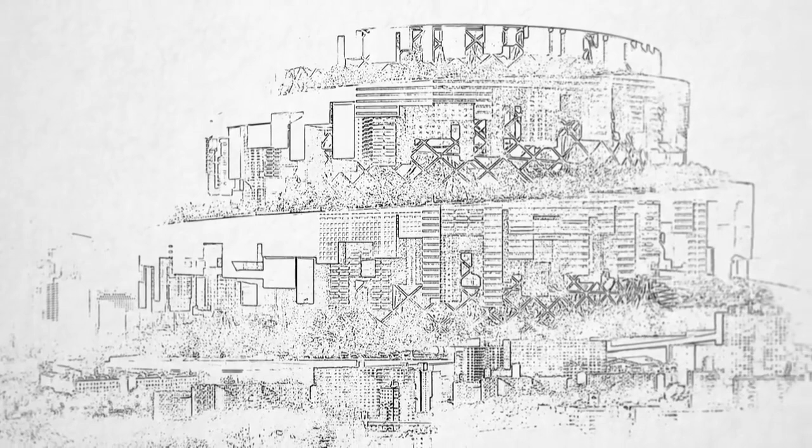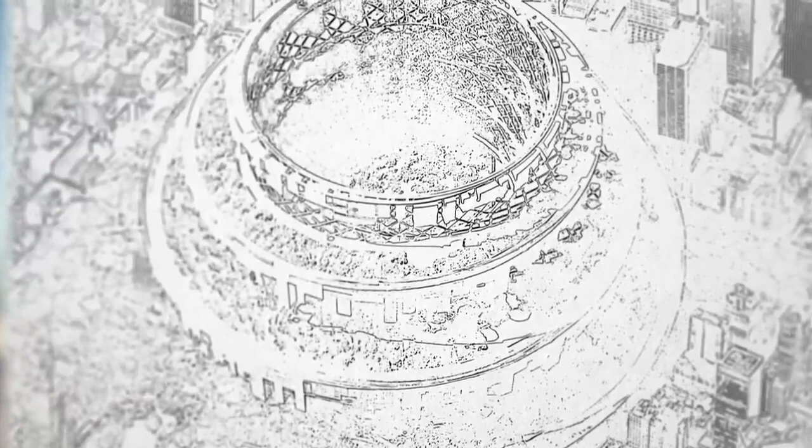Max Schwitthaler, an architect from Berlin, has numerous visions of what the city of the future could look like. His designs have names like Babeltown. Instead of showing individual buildings, they show entire neighborhoods, parts of a city, that appear lifted straight from the set of a science fiction movie.

That's how futuristic his designs seem to be. They ask what the city of the future might look like if we dispensed of conventional forms of mobility, like the car and the traditional elevator.

Some of these are provocative images that may look utopian at first glance, but there's nothing utopian about them. Babeltown was simply the idea of how the linear movement of a tram or a train could be turned into a spiral. The same goes for the village.

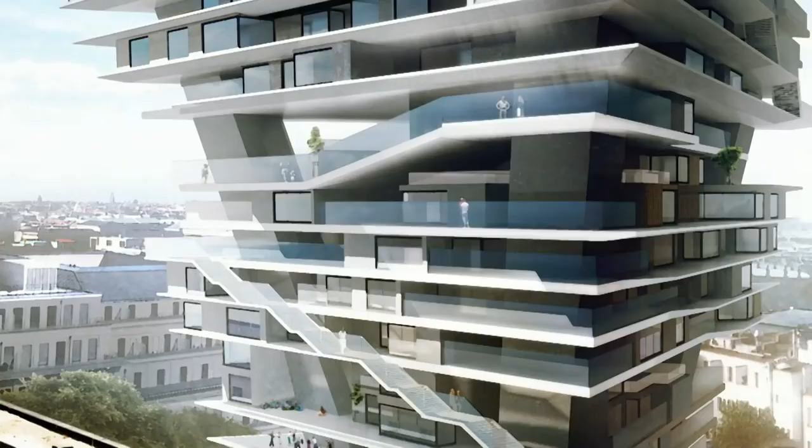The idea was to see what happens when we have a diagonal elevator, a zigzag movement. We wanted to show how the movement through the space is always the inspiration for the space itself. Just as it is flat in a car city and vertical in an elevator city. That's exactly the same, only other mobility technologies serve as the input and inspiration for the design.

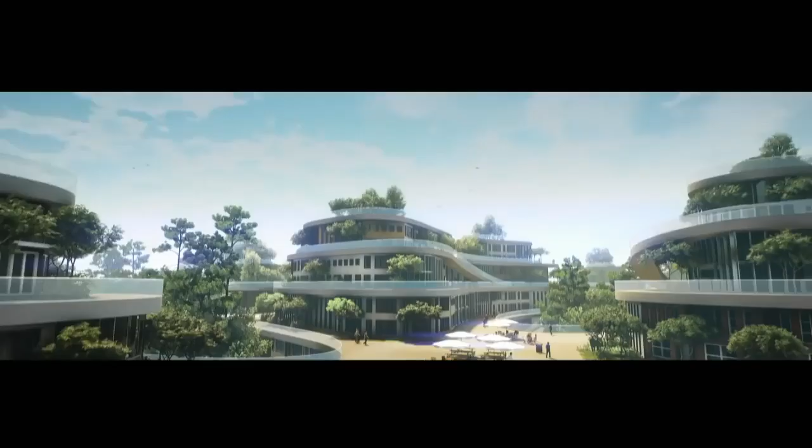Schwitthaler's current concept was also based on this principle. He calls it the urban shelf. A neighborhood complex in which there are no cars taking up valuable space, but where people move from place to place with the help of so-called micro-mobility solutions, which are extremely flexible.

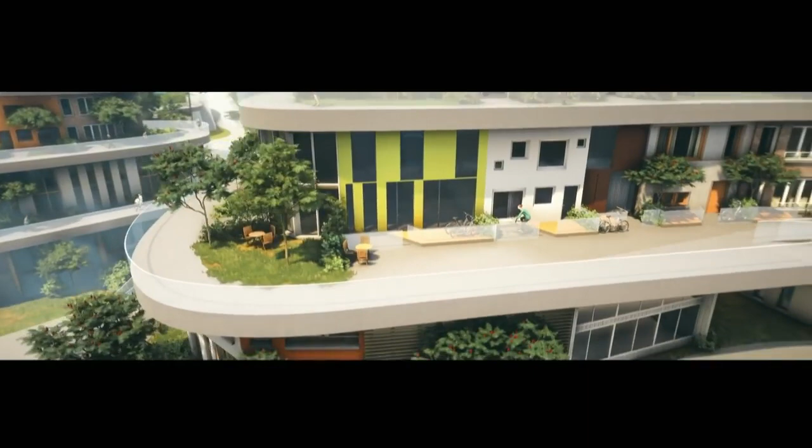Instead of thinking in terms of finished architecture, we're focusing on the infrastructure that makes living together in a neighborhood possible in the first place. This starts with the basic structure and includes the floor, the ceiling, and the load-bearing structures, and the necessary infrastructure for water and electricity.

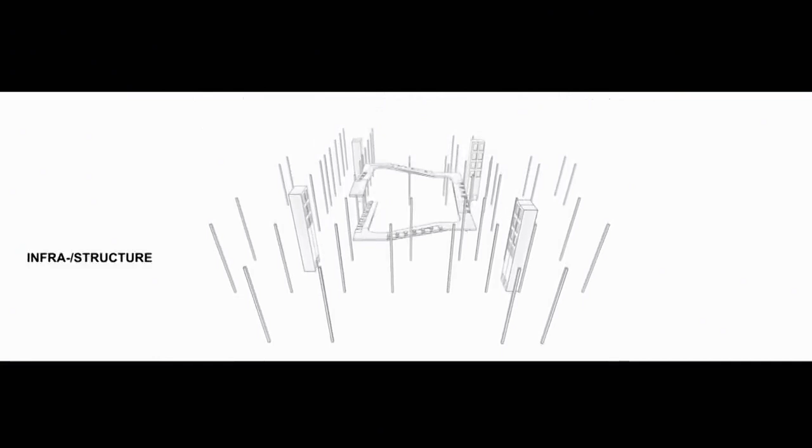Everything is built like a giant shelving system. Floors are stacked one on top of the other, with the shelves filled in between them. There are no individual buildings, but rather a single superordinate structure.

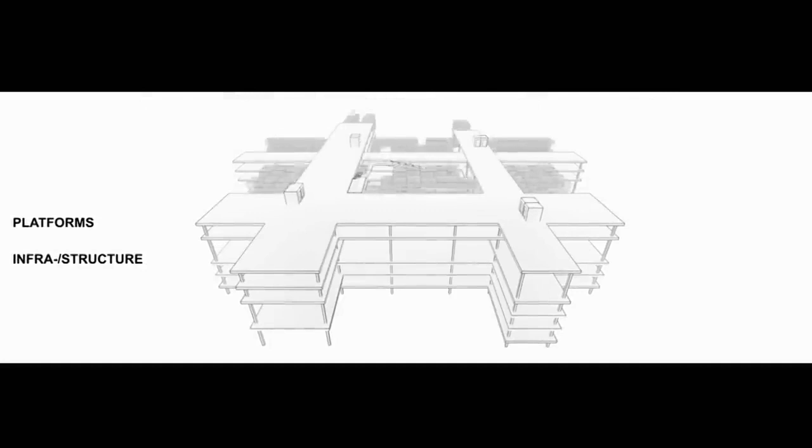The idea is that these shelves will be connected with ramps for e-bikes, which can then easily ride up the hill, providing access to pergolas and public spaces that are found on the different stacked layers. And in between, there is room for living and working.

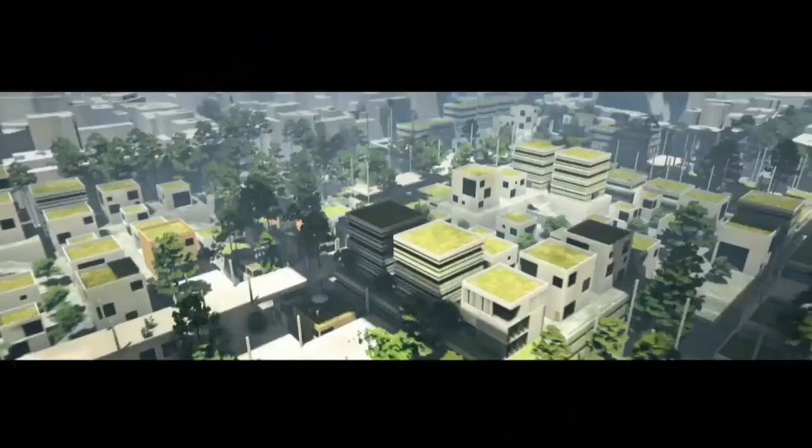That's the basic idea. It can be a very flexible way of building. It's not cast in concrete, so it can change over time. Material, function, size. What happens between the shelves is completely flexible. Only the basic structure is built to last forever.

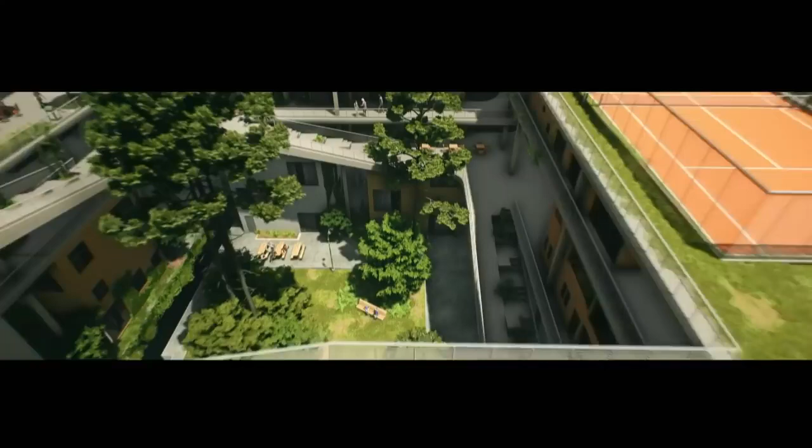There are no high-rise residential towers here or multi-lane highways. As glib as it may sound, Schwitalla has created his design with people in mind.

The urban shelf seeks to provide solutions to the densely populated city of the future, but aims to do so on a human scale. It creates meeting places that we otherwise lack in cities today, not just on one level, but on different levels. People can actually meet and interact on several different levels. And that, we believe, is how we can and must ensure the social sustainability of a city of the future, through social exchange. We go to the city to meet and interact with others.

Tempelhofer Feld in Berlin, formerly home to one of the city's airports. It is the largest open space in the German capital. This morning, Max Schwitalla has converted this space into an experimental laboratory. It is the first step in turning his design into reality.

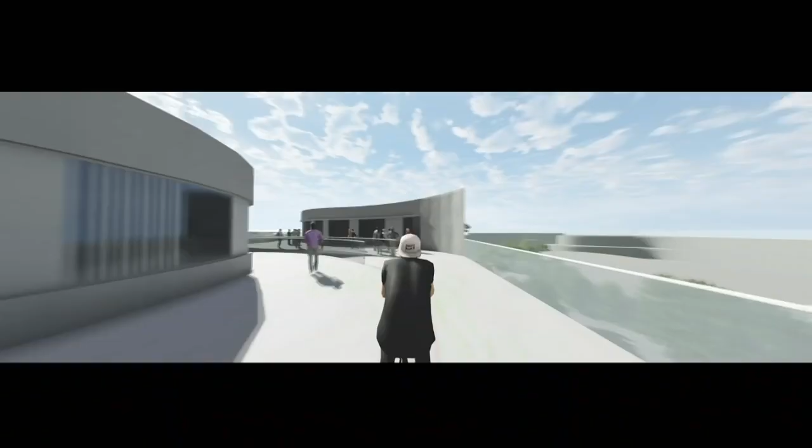Via an app, a virtual map is created that makes the urban shelf a livable experience. All that's required is enough space and the right vehicle. Max's colleagues provide support during his test drive.

Here you can see the path that you can follow. You can also see some neighborhoods or buildings that you can't drive through. But the key thing is the path, which is shown here in blue. If we now project the virtual designs from the computer onto the surface, then we can literally experience them for ourselves by cycling through these neighborhoods and getting a sense of what it feels like.

Then we can see if the curves are a bit too tight, or if it's a bit too long and straight and therefore a bit boring. That way we can adjust and change the designs again after experiencing it out here in 3 dimensions.

Every day, Schwitalla sees how the need for alternative forms of urban mobility is becoming increasingly urgent. Parts of the heavily congested Leipziger Straße in Berlin have recently seen a speed limit imposed due to rising levels of air pollution.

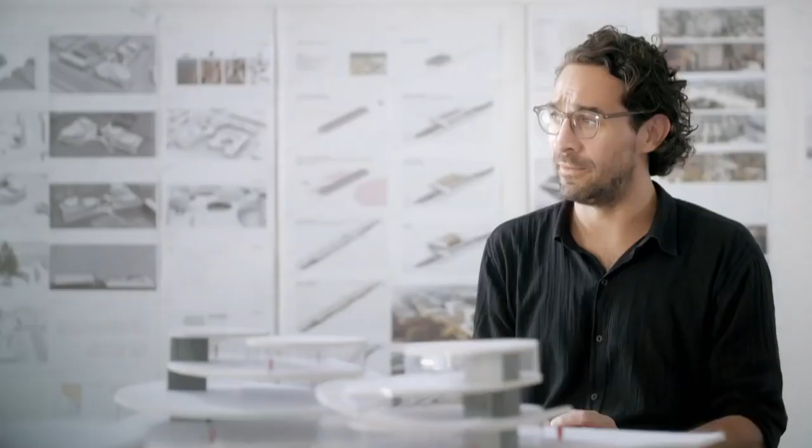Of course, we don't have the same traffic problems that we see in Mexico City or in India or in other developing regions and the megacities they have there. But even here you notice the fine dust pollution. So we have to ask ourselves, how can we get the cars out of the city? How can cities continue to grow? We also need more affordable living space. There's enough for us to focus on here in Europe.

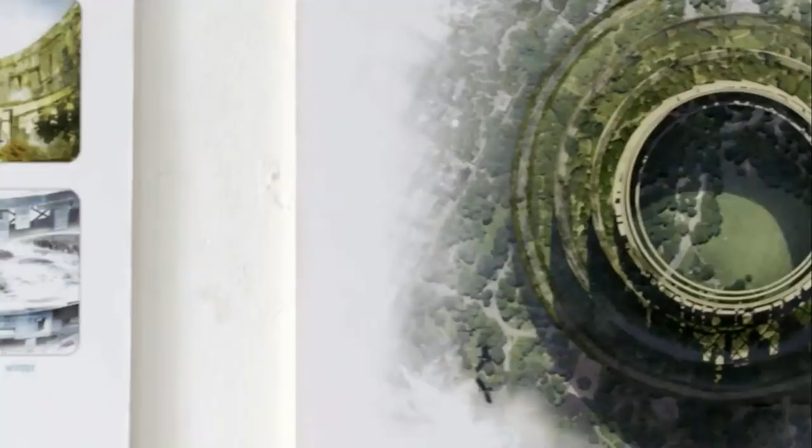Schwitalla's architecture studio often works together with companies from the mobility sector itself. These include car manufacturers and elevator builders, such as Audi and Schindler. The industry has long recognized that it can only remain sustainable by providing new solutions.

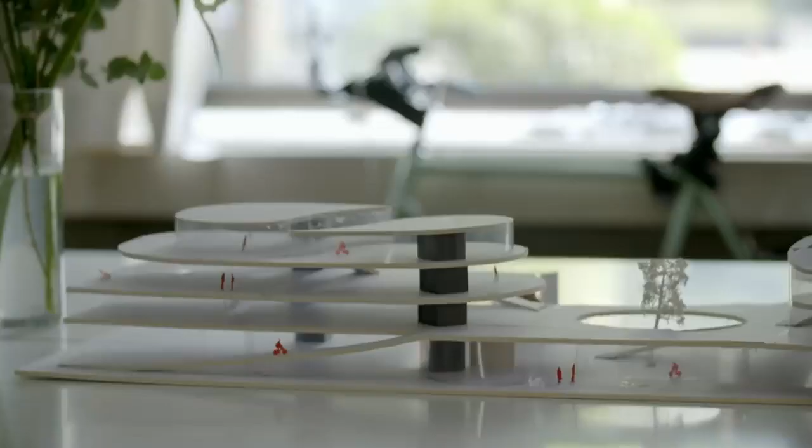For Schwitalla and his colleagues, the future of our cities depends on our willingness to rethink established structures. The urban shelf frees itself from the idea of architecture as a design spectacle and instead offers a system-based solution, one that is individually adaptable to any location, to any social structure.

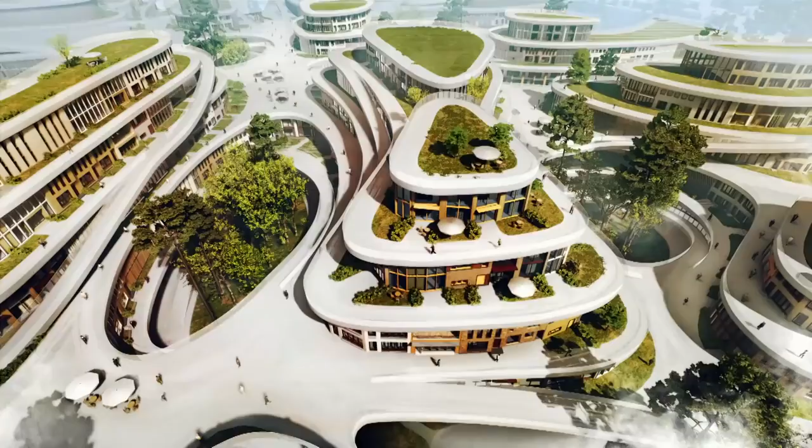The shelf contains space both for luxury apartments and affordable homes.

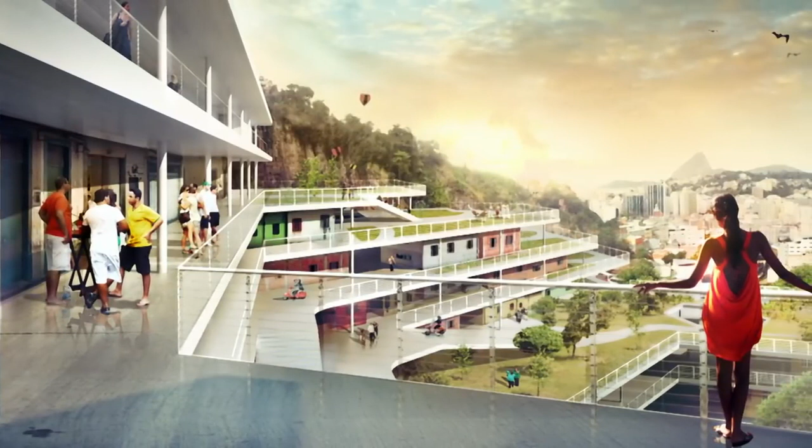We studied the idea together with students in Brazil and found that it would make sense to have the basic structure financed with public money to build the essential infrastructure, and then have the people living there build the living spaces within it, their neighborhood, with their own hands.

A bit like they do in the favelas already, but within the structure of the urban shelf. That's also what we were aiming for, a certain versatility and visual diversity in the appearance of these living spaces.

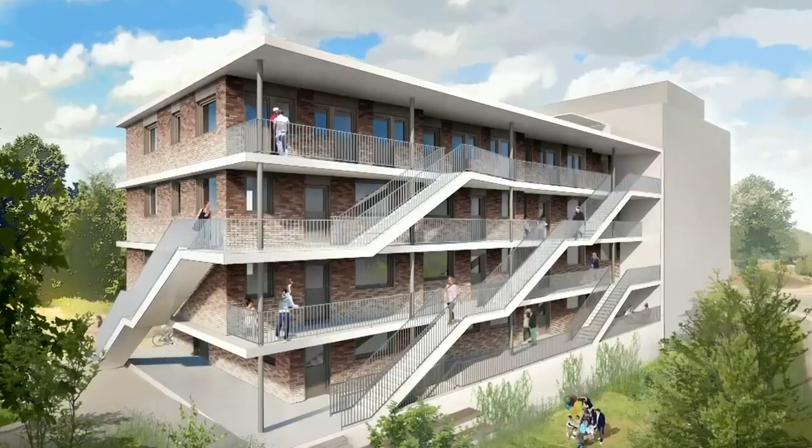In Tübingen, in southern Germany, this dream may soon become a reality. The first urban shelf has just been created here. While not yet a fully fledged urban neighborhood offering micro-mobility transportation options, it will nonetheless provide space for people to meet and socialize. Students and refugees are intended to live here.

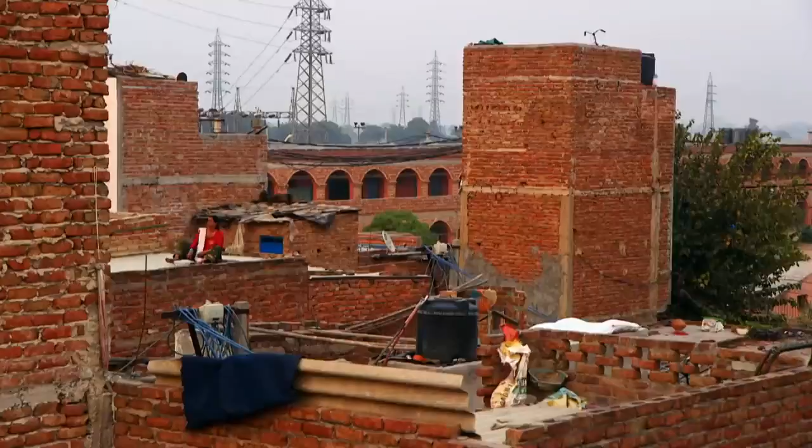How cities grapple with this is going to be a challenge, because cities are about people living together and working cooperatively. And if you can't live together in a city, you can't have a city. The system breaks down.

You don't have to travel to the developing world to see what this looks like. This problem has long been part of Western societies as well. A stone's throw away from Harvard University is the Massachusetts Institute of Technology, known as MIT. More than 11,000 people study at this elite university, but they can't live here. While there are plenty of laboratories and offices available, there is nowhere for people to call home.

The decision about land use is captured by international companies or real estate developers that want to maximize their returns. So as a result, in this neighborhood, we have no grocery store, there's no pharmacy, there's no daycare center except for MIT people, there's no healthcare facility. You would have to walk a long, long way to be able to buy broccoli or a toothbrush. And very few people live here. What little housing is here is only for rich people. So at night it's completely dead here because it's not really a functioning community.

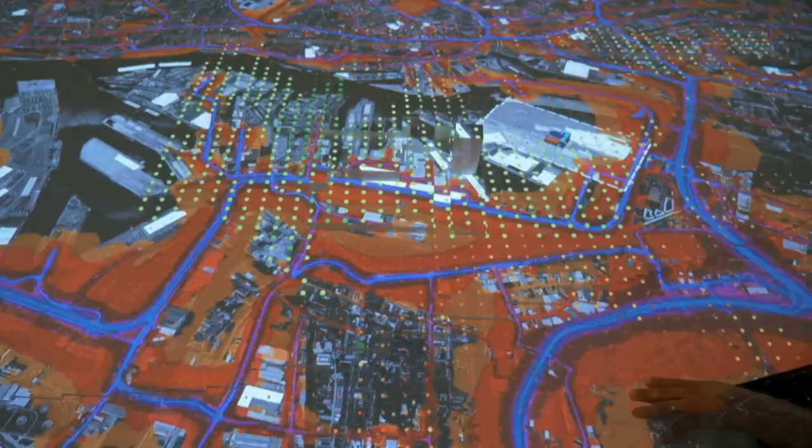It's not that urban planners don't care about these issues, but that they don't really have the tools to have an impact on them. Now, researchers at the MIT Media Lab are building these tools. The study group City Science is looking for ways to make towns and communities more livable for their inhabitants through the use of new technology.

The group is led by Kent Larson. Previously an architect, he is now focused entirely on research. One of the applications of technology that we are most excited about is to reinvent the process using technology and the decisions about land use.

Neighborhoods and entire cities can be simulated on one platform. What happens when new homes and offices are built? How does the flow of traffic change? How many inhabitants are too many? Which parts of the city are busy and at what times?

This is Kendall Square, where MIT is. It's a 1 square kilometer district. MIT now has control of 14 acres, this area right here, and they are going to be developing this in the future. It's the last opportunity to turn Kendall Square into a real functioning community.

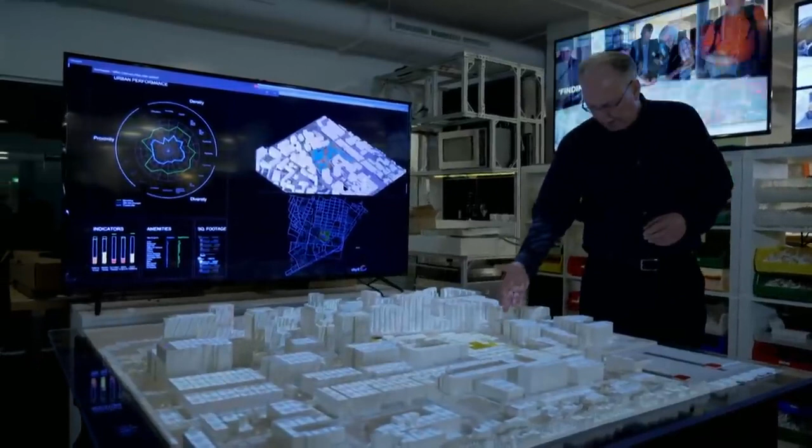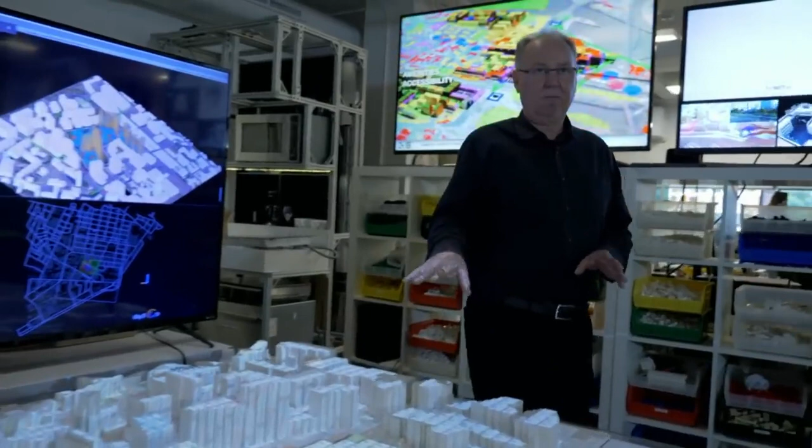So you can see most of the buildings here are represented by these codes. O is office and R is residential. So then when we run our simulations, we're taking into account the mix of people of different demographic profiles that might live or work in each of these locations, and we can change those on the fly.

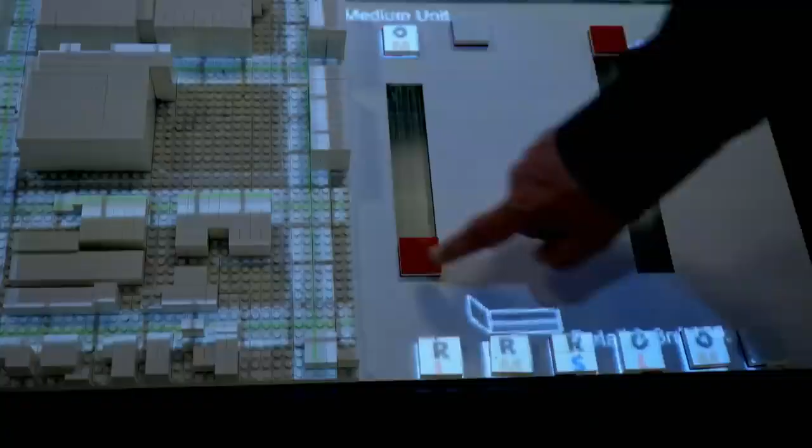The model has been fed with data sets that allow countless scenarios to be simulated and urban planning to be carried out in an interactive way. The idea is to be able to predict the consequences of planning decisions. The individual components of the model are like building blocks that can be exchanged, which has an effect on the entire neighborhood. Lego bricks are used to simulate the construction.

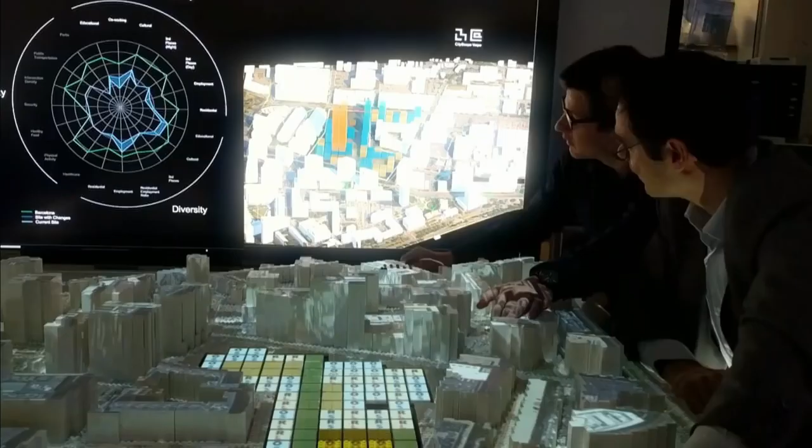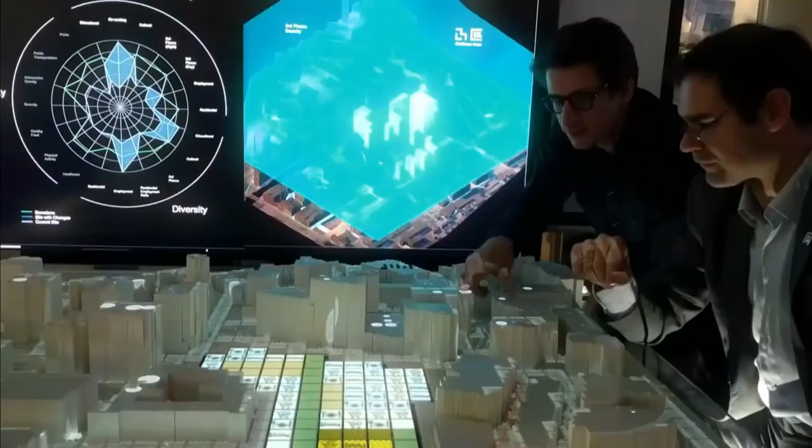With this kind of tool, you can have lay people who live and work in the community be involved in an interactive way in the process, and you can have the mayor, the staff, and the civic leaders be involved too. We think of it as a democratization of design, putting powerful tools that are currently only available to experts into the hands of non-experts to engage them in the process.

This dialogue between urban planners, investors, politicians, and citizens is an attempt to meet the needs of those who actually live in the city.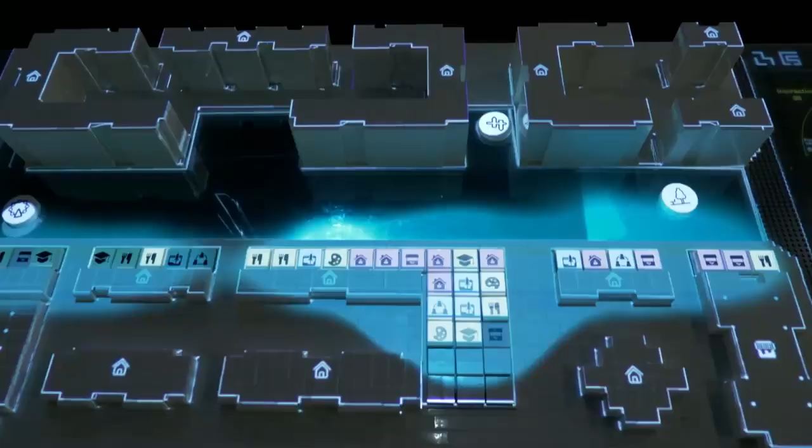The first projects are already underway. We're working in Hamburg, using a tool like this to help address housing for refugees. We're working in Helsinki to help redesign the campus at Aalto University. This model is a street in Shanghai near Tongji University. Eventually we'd like to turn this into an open source platform that anybody could use. I'd like to see it in hundreds or thousands of cities all over the world.

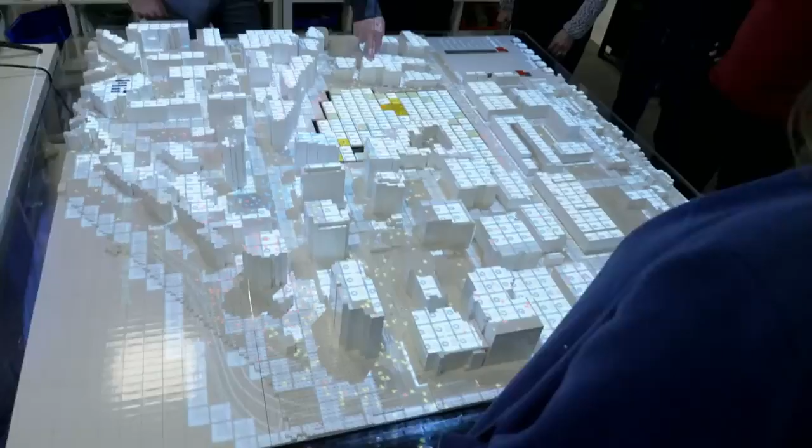You can move it up just a little bit more. This is office, the bar is residential. You can see parks. And in this case, we also had cameras in the street here.

It's really critical that urban design and urban planning become more agile and adaptable in the future. The notion that you can create a master plan that gets passed by a city and stays valid for 10 or 20 years, when technology, economic systems, and social patterns are changing so rapidly, is just an invalid concept. The old ways will never be fast enough.

On its mission to improve city life, the City Science Group is interested in more than just urban planning. Another of their innovations, robotic interiors, was also developed at MIT. The scientists are working to answer a specific challenge: how flexible can a single room be?

Going back to Roman times, we still design the same way. The idea is that a space is basically for a single function. You have a bedroom with a bed where you sleep, a dining room with a dining table where you eat, and a living room with a couch where you entertain. You end up with all these rooms, and as you begin to shrink the apartment—because there's no choice in the city, land is so expensive—you get to the point where you can't have single function spaces. It's just impossible.

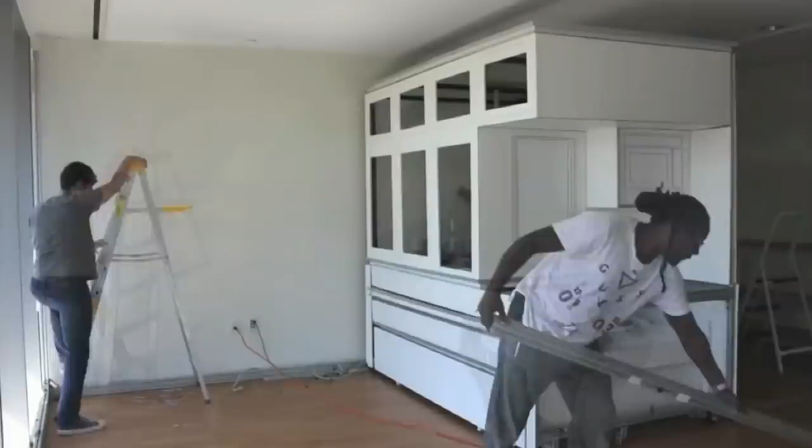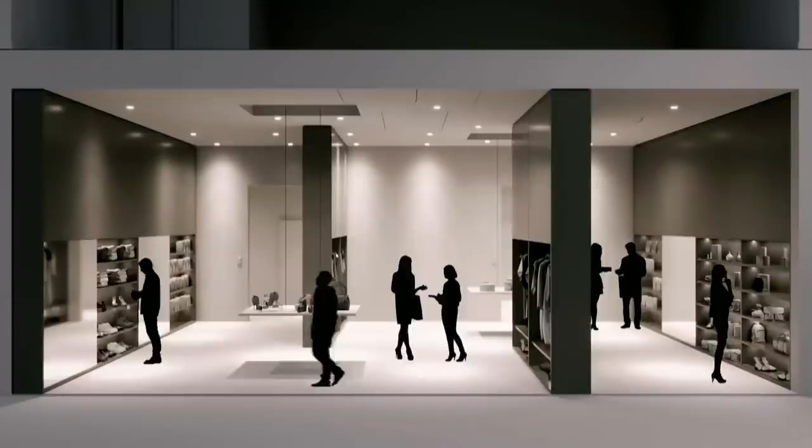And now the research project has turned into a commercial startup. It's called Ori Living, from Origami, and it has already raised over $20 million in investment capital.

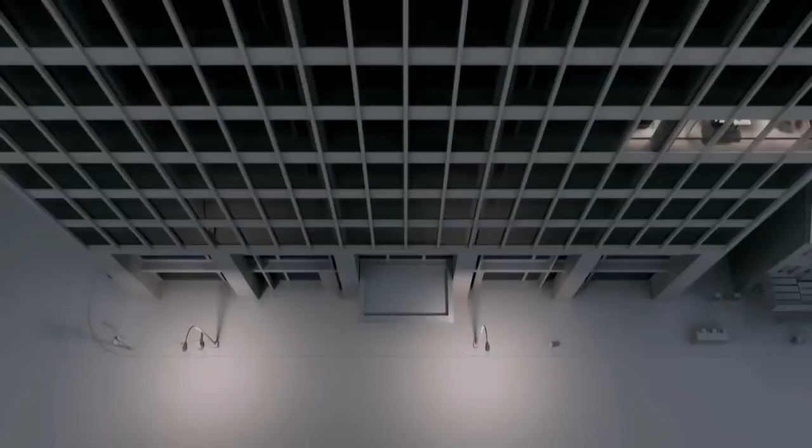The transformation and design of spaces with the appropriate technology allows you to configure the space effortlessly for whatever function is at hand. That's a very hard challenge, but we're beginning to make it work, and I think that is the future. I'm totally convinced that in 10, 15 years, every apartment in the city will have this. Urban space is too valuable to be static.

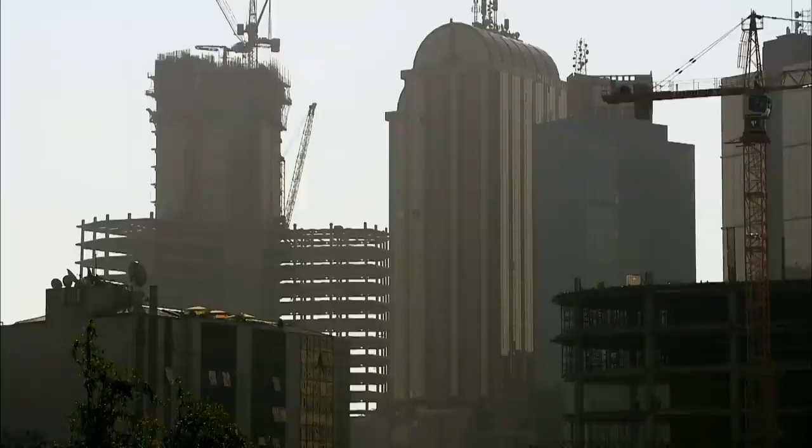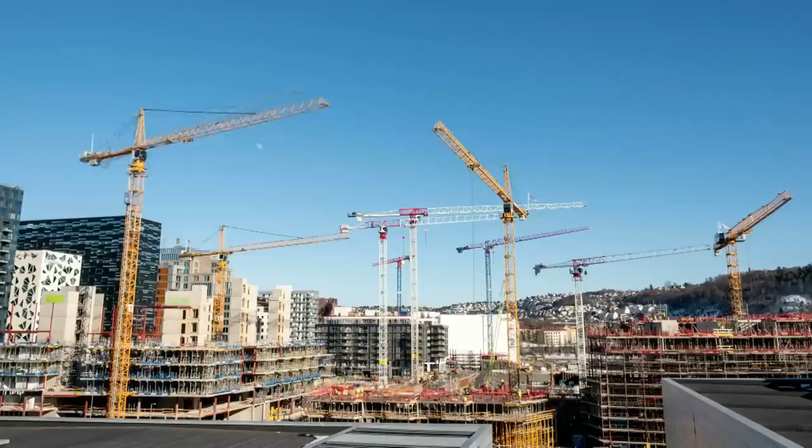Innovations help us to overcome the challenges we will face in the future. And yet, when it comes to building, we are still not innovative enough to ensure we will even have a future. The urbanization of our planet has led to an insatiable appetite for new buildings. Worldwide, 4 billion tons of cement are produced every year. The construction industry is therefore responsible for a significant proportion of greenhouse gas emissions and the use of precious raw materials.

We are running out of resources. As Buckminster Fuller said, we are on Spaceship Earth—he wrote a book called Operating Manual for Spaceship Earth, meaning it has finite resources. As Gandhi said, this planet is enough for our needs, but not for our greed. And I think we've moved into becoming too greedy.

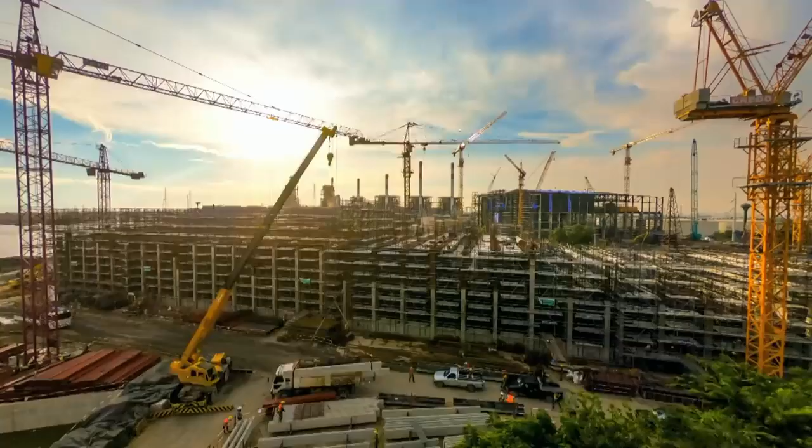There is such a demand for building materials around the world. For example, in China, more cement has been used in the past 3 years than in the USA in the last 100 years.

We are using our resources at a much faster rate than they can be replenished. The same goes for sand—we are consuming more sand than is produced through natural erosion. Sand is needed to make cement, which is why it is so precious for the construction industry. That it could ever run out is hard to imagine, since about 1/6 of the planet's land surface consists of sandy deserts. But this type of sand is unsuitable for construction.

To make cement, you need the kind of sand where the grains interlock and stick together. This does not take place with desert sand, so it cannot be used. That's why the city of Doha, for example, despite being located in the desert, has to be built with imported sand. Qatar imported $6 billion worth of sand into the desert last year.

The effects of this multi-billion dollar sand trade are disastrous. The need for building materials is so great that sand is being sourced illegally. Beaches are disappearing. Riverbeds are being dredged so much that their flow rate is changing, all so that newer and ever more ambitious building projects can be realized in the world's major cities.

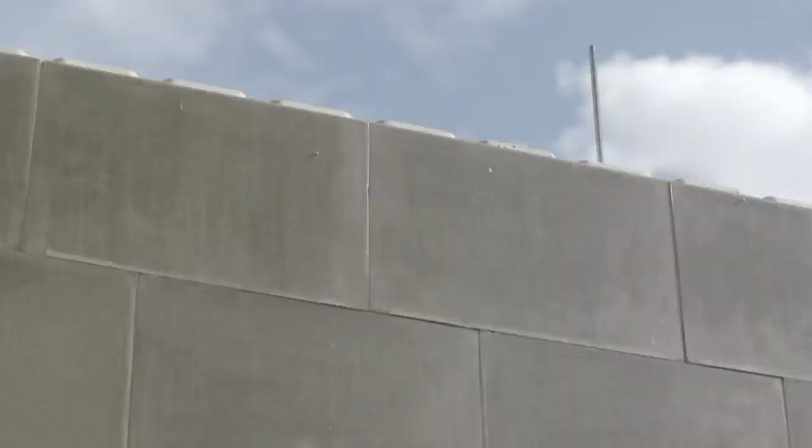In a small town in the German state of Thuringia, that is exactly what is happening. A new building material called polymer concrete has been created. These bricks could revolutionize the construction industry, as they are made largely of a raw material that has so far been unsuited to building: desert sand.

Gunther Plötner and Gerhard Dust are the inventors of this miracle substance. Together, they founded the company Polycare.

The past few years of research have made the two men something of sand experts. They know exactly which weight and size of grain are required for their specific purposes. Their time in the laboratory is spent perfecting the formula of their building material.

The sand is sucked into the machine, and a polyester resin, which is a liquid, comes out of a tap. The two are mixed together, and this mixture comes out at the front towards an outlet pipe. At the last moment, we add a hardening agent.

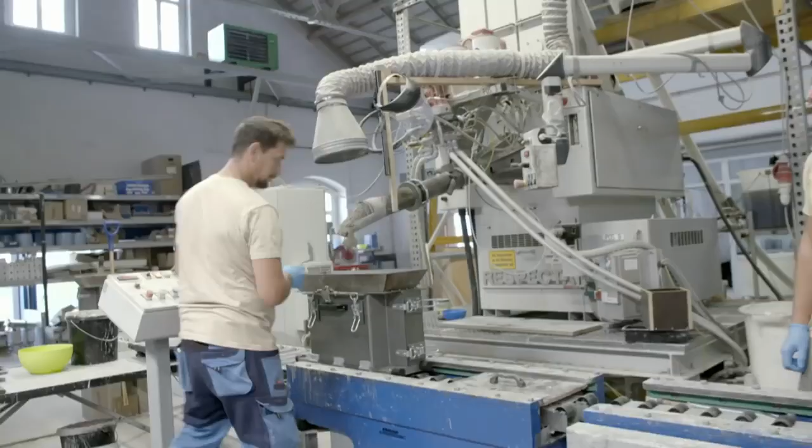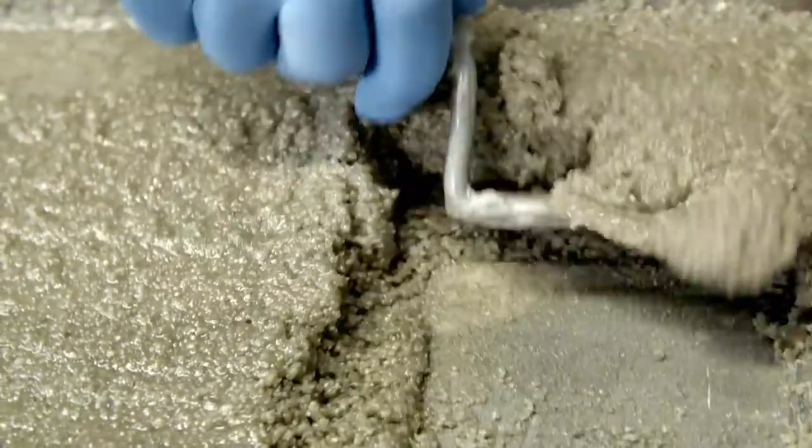It's a bit like baking a cake. You add the baking powder to the cake mixture, and the cake rises. The polyester resin that is added to the sand is a plastic, yet has similar properties to tree resin. This polyester resin moistens the sand and glues it together.

What's special about our polyester resin is that it consists of 38% recycled PET bottles. So basically, we're gluing desert sand together with recycled plastic bottles to form a building material that will essentially last forever. The great advantage of polymer concrete is that once it has been applied and becomes solid, it's completely non-absorbent and releases nothing into the environment.

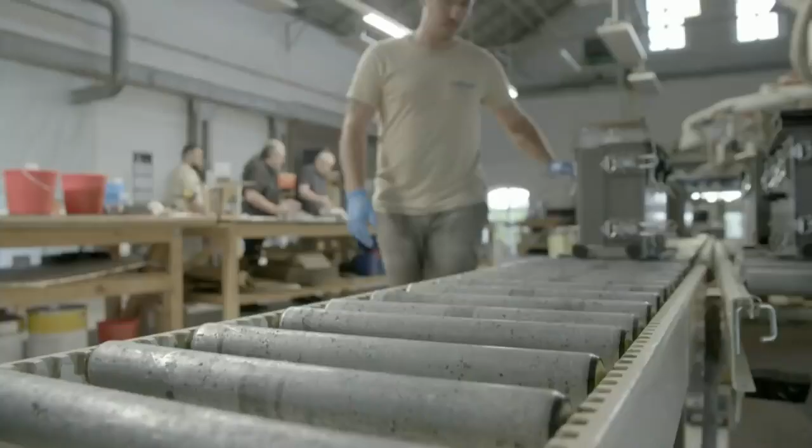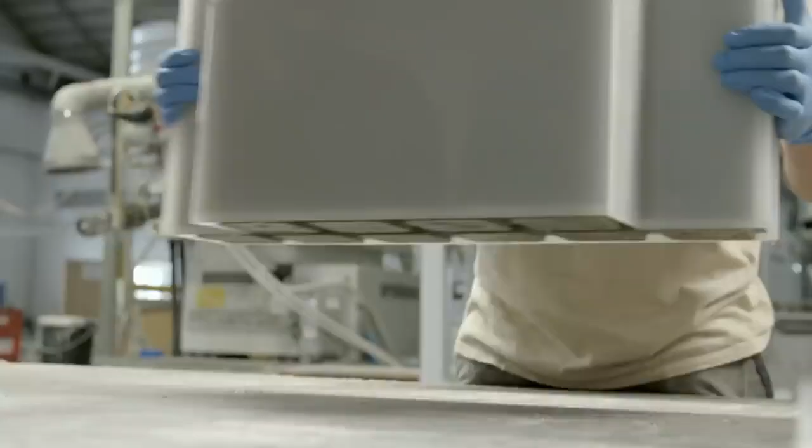It takes about 20 minutes for a brick made of polymer concrete to set. This is unbeatably fast compared to conventional concrete. And it has another clear advantage: the production process requires no water at all and generates significantly less CO2. The result is a Lego brick for adults that can be created quickly and, above all, easily.

The idea of producing this construction material came to us after a natural disaster, the terrible earthquake in Haiti in 2010. My colleague Gunther Plötner and I got together and thought about what we could do to empower people to rebuild the island themselves.

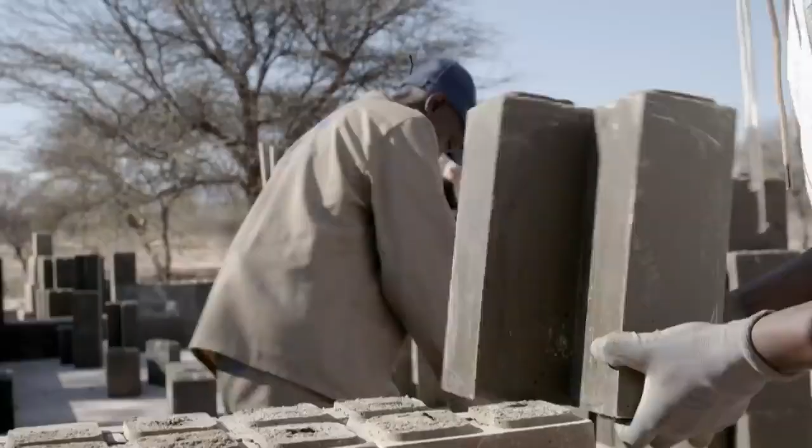In a small village in the middle of the Mount Etjo Nature Reserve, the latest construction site is located. Here, a church is to be built entirely from polymer concrete. Except for the site manager, the workers are unskilled because the construction itself does not require any specialist training.

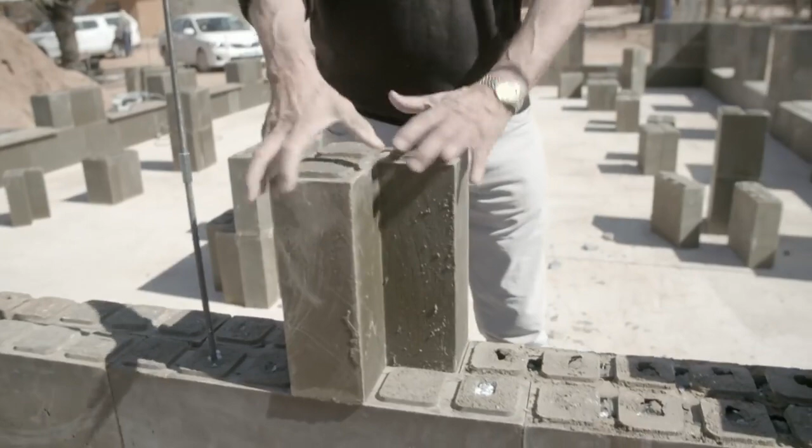These bricks have the same opening at the bottom as they do at the top, and that's why you can simply put one on top of the other and it fits. All of us played with Lego when we were children. I think that's why the principle is easy to understand. If children can do it, why not grown-ups too?

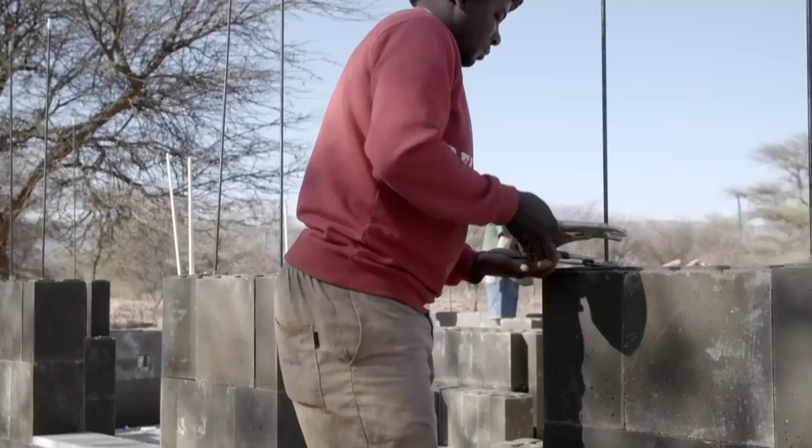The exact number of bricks that will be needed for a building is calculated in advance. This helps reduce the amount of construction waste. I believe this one is a little bit too high.

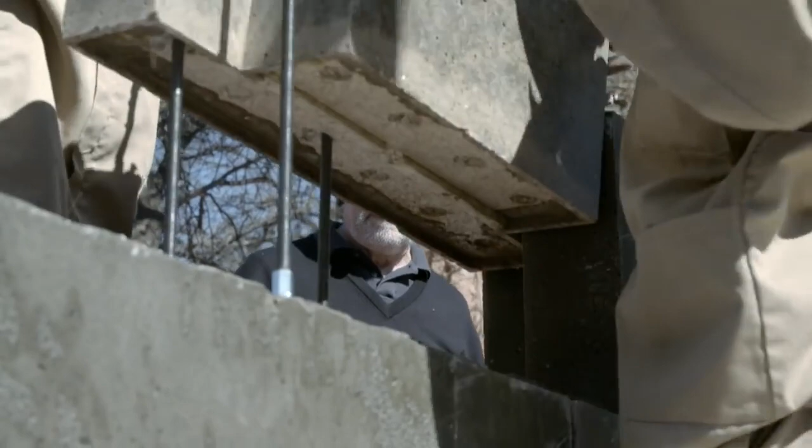Not only that, the plug-in system requires neither mortar nor any other binding agents. To make sure the walls are completely stable, the bricks are also screwed together using these long threaded screws.

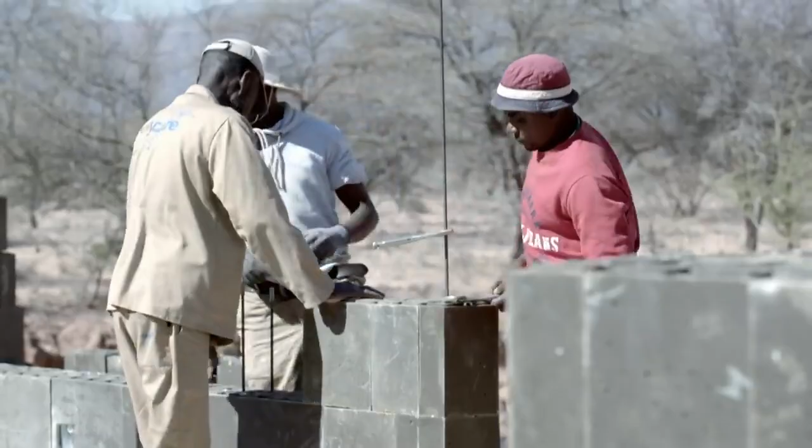In just 5 hours, the entire facade is almost finished.

Miriam Shikudula is the good soul of this project. Miriam tells us that the community is only getting a new church at all because of the donations of tourists from Germany and America. Their current church is merely a shipping container with door and windows.

It's very small and it's very hot. And when it is cold, it's very cold. There's many people, some stay outside, we open there, and some people stay outside there. I see the church is very important because if somebody gets sick or has any problem, they will come to church asking for prayer. Yeah, and you pray for them.

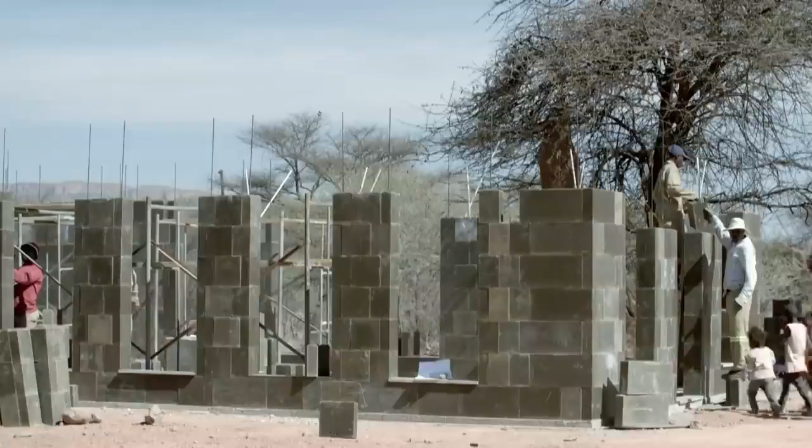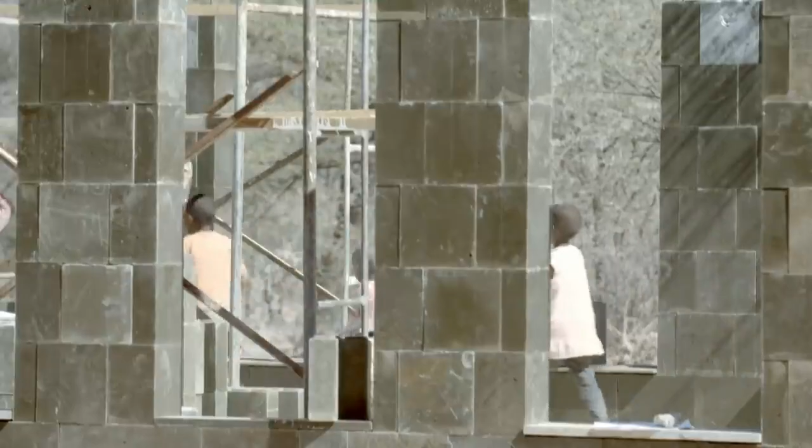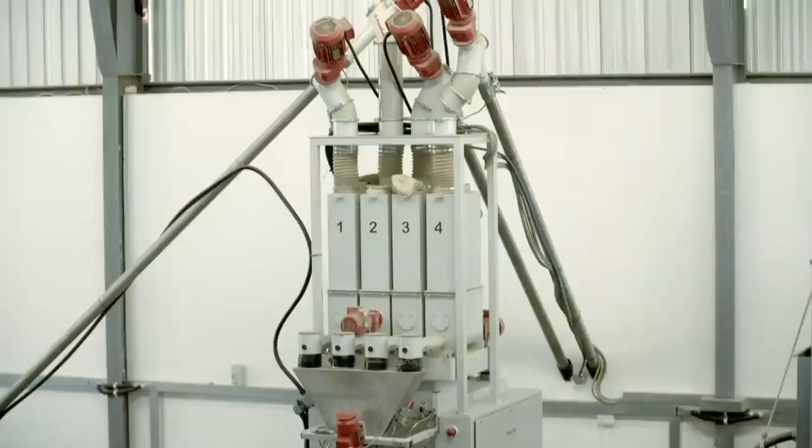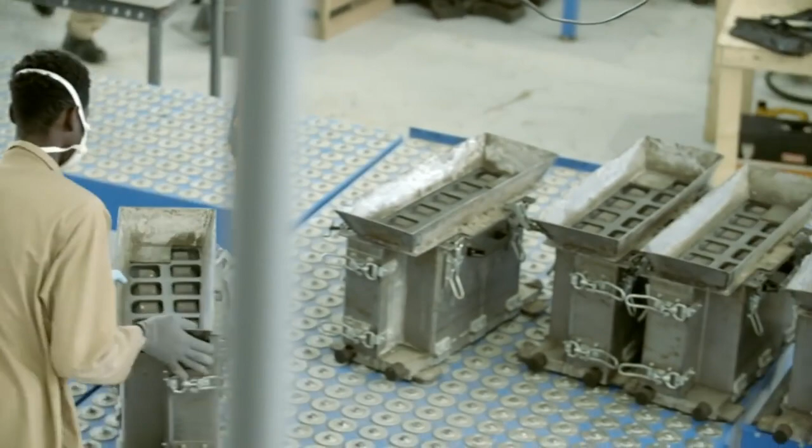A few hundred kilometers further south, near the capital Windhoek, a new supply of building materials is being produced. For the past few months, the first polymer concrete bricks made directly in Namibia have been created here. This is Polycare Namibia, the first production facility outside Germany.

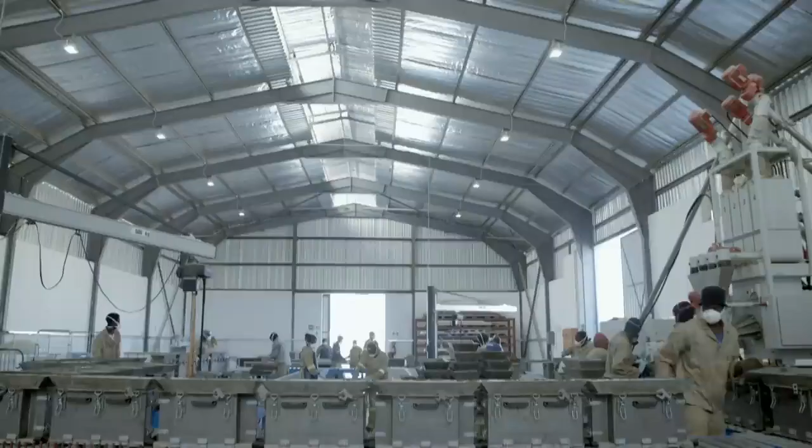We have a new team made up of 15 women and 15 men from the neighboring shantytown. We've been in production here since February and are producing enough materials for one new house every day. Sand from Namibia is turned into bricks that look different from the ones we produce in Germany, simply because the sand is a bit different.

We get to see the houses that are built here, how the people live in the houses, and how it changes their lives. We also see how the lives of our workers change. That's what's so great about it.

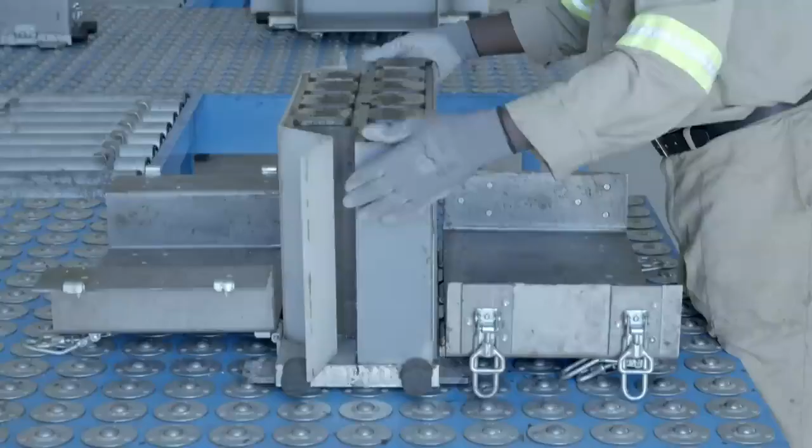The shanty towns on the outskirts of Windhoek. More than a third of the Namibian people is said to live in such makeshift settlements. And yet, a house made by Polycare has already been built here. Previously a model house presented to the Namibian government, the company has since donated it to the Philip family.

Before that, their living conditions were quite different. It was small, we didn't have a kitchen like this, so we mostly used to do our cooking outside the house. When the rain comes, it goes straight inside. They destroy the TV, everything. It's not a good house.

Everyone just is dying to have a proper house. As you were coming, you could have seen on the road that most of the houses here are just made of iron, these iron houses. So they all want to have a proper house, a decent place to put their head, and yeah, a place where they can call home.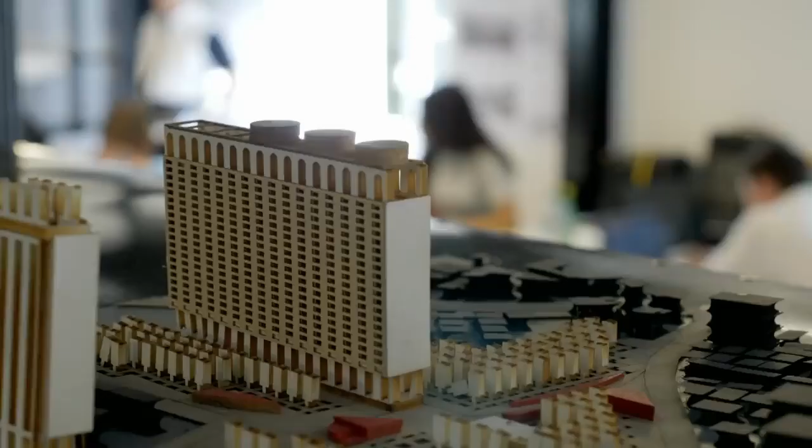Architecture is a culture that absorbs and transforms things to allow something new to emerge from them. Anyone who has studied architecture can design something, but the challenge lies in bringing all these disciplines together. And that's what we're focusing on here. After all, people who have studied architecture should be in a position to change the world.

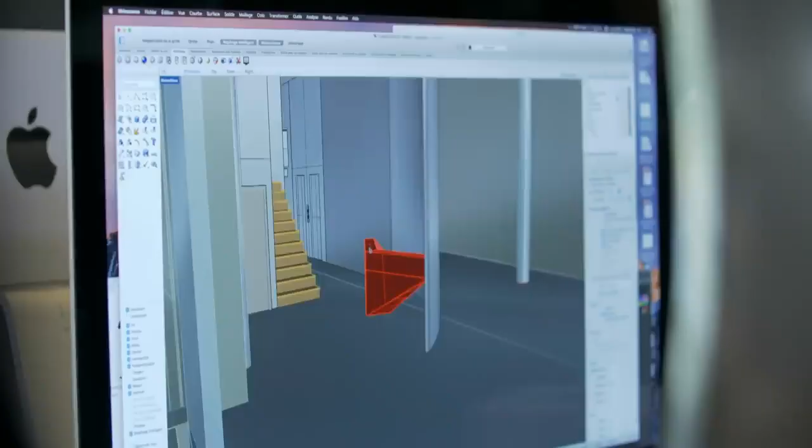Odile Decq has taught at various architecture schools and universities. But she often found the way architecture was taught too rigid, too conservative, too theoretical. So she decided to found her own school of architecture and pursue the questions that interested her. What is the role of the architect and of architecture today? And how can they solve the challenges of the future?

There are some architects who carry out data research. They take data sets and use them to analyze the location, the environment, or the city, and then determine what people, in effect, what the customer needs, without ever bothering to meet the people they are designing for and getting to know them. The human dimension has completely disappeared in architecture. That's actually what I regret the most. And that's why I think we need to bring the humanistic idea back into the training of architects.

When constructing a building, you have to deal with the person you are working and designing for. You have to understand their wishes, because their wishes are the basis of our work. Unfortunately, this is rarely talked about in architecture schools today.

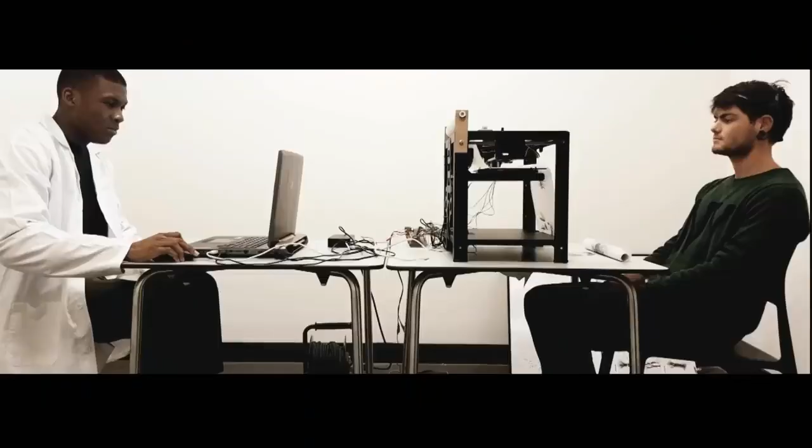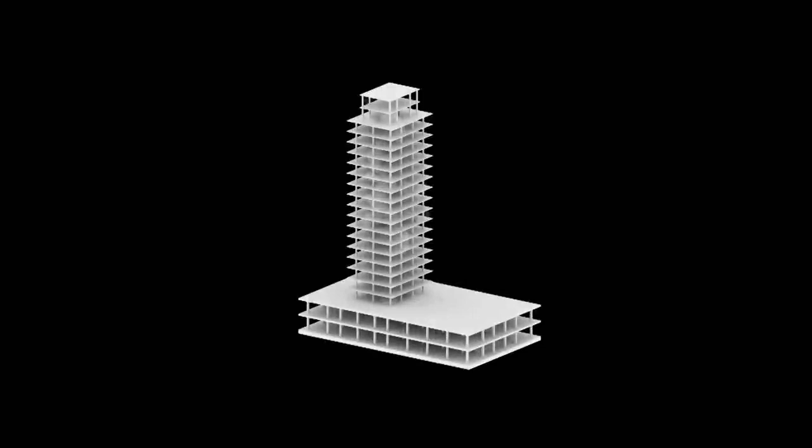How these wishes can be incorporated into architecture as directly as possible is the subject of Joséphine Borrat's master's thesis. Her concept allows the shape of a building to be determined by the brainwaves of its inhabitants. In Joséphine's thought experiment, the architecture even changes as the brainwaves change, thus reacting to the inhabitants' emotions and needs.

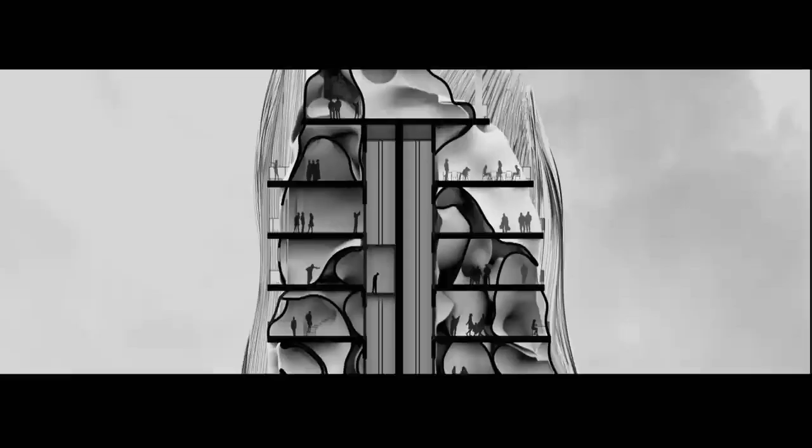The idea was to ask what would happen if the human body and architecture had some kind of common technological DNA. We are rethinking how we will build and live in buildings in the future.

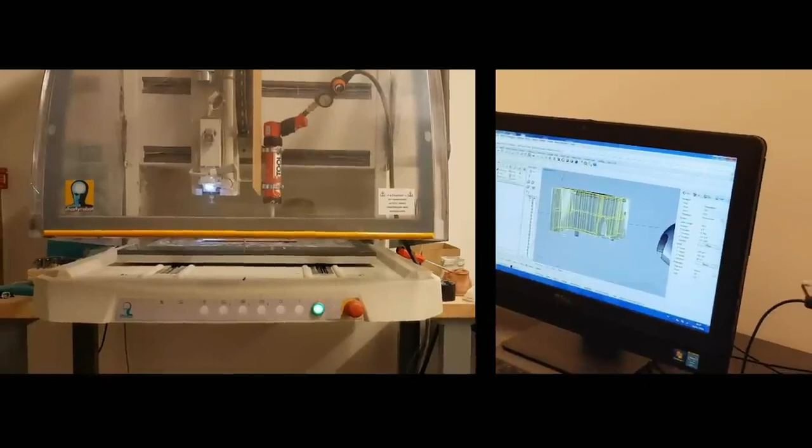Using a 3D printer, the geometric shapes created by the brainwaves are translated into real models. The principle works.

Nowadays, we can gather brainwaves and transcribe them into geometry. Of course, we're not able to interpret brainwaves and to say what someone is thinking or feeling at any given moment. But we can collect clues about a person's sensations, feelings, or impressions.

The idea of this project was to question our future role as architects. It's about bringing together a range of disciplines and realizing projects that touch not only on one aspect, but on several aspects of a field, from neuroscience to urban planning.

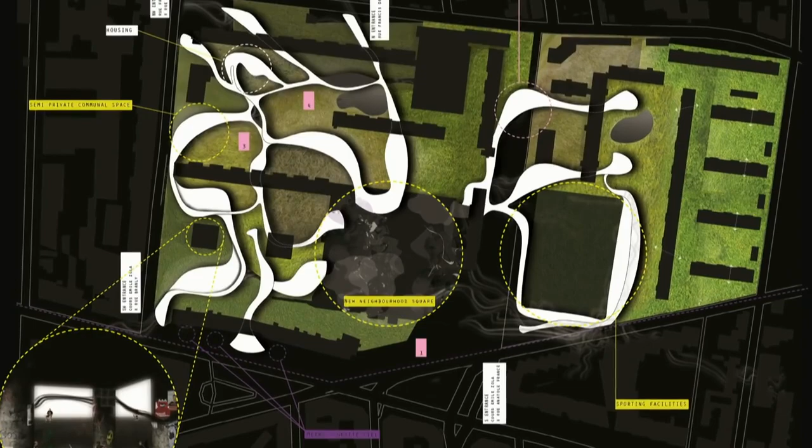The students' designs could sometimes be mistaken for modern art. The young architects experiment, dream, find unusual perspectives. Often it seems less about the feasibility of a design than about the idea behind it. What would it be like to live on the moon?

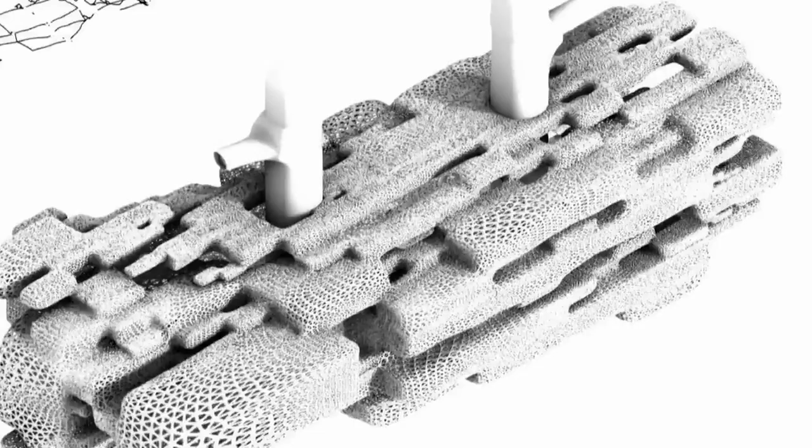If our profession only requires us to follow rules and design buildings that comply with the regulations of the day, then the job of an architect will eventually disappear. If architects, or as I prefer to say, people who studied architecture, because not everyone necessarily ends up becoming an architect, have a vision of the world, a viewpoint, and are able not only to do their job, but also to imagine the future, then architecture will continue to play a role in the world.

We must start thinking about tomorrow today and act now for the sake of our future. When I teach, I always tell my students how much I envy them, because they belong to a generation that is about to reinvent architecture for the next 100 years. Isn't that fantastic?

Designing how space will be used in the future has never been more important. It's a daunting task because so much is at stake. How and where we will live together in the future will not only be decided by architects, urban planners and engineers, but they can play their part in ensuring that this where and how will continue to exist at all.